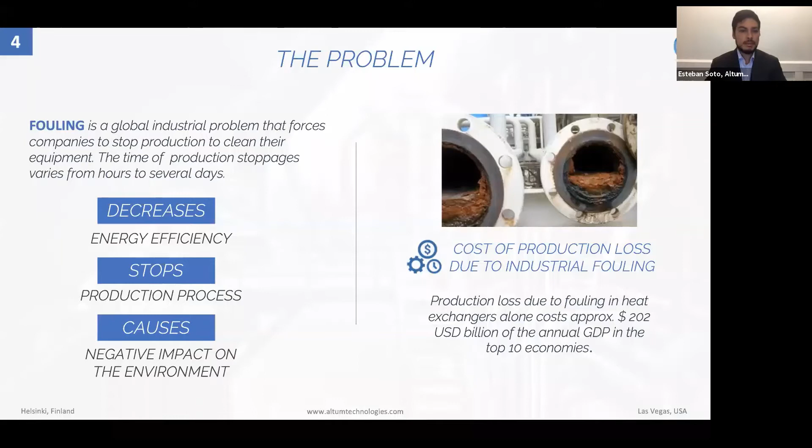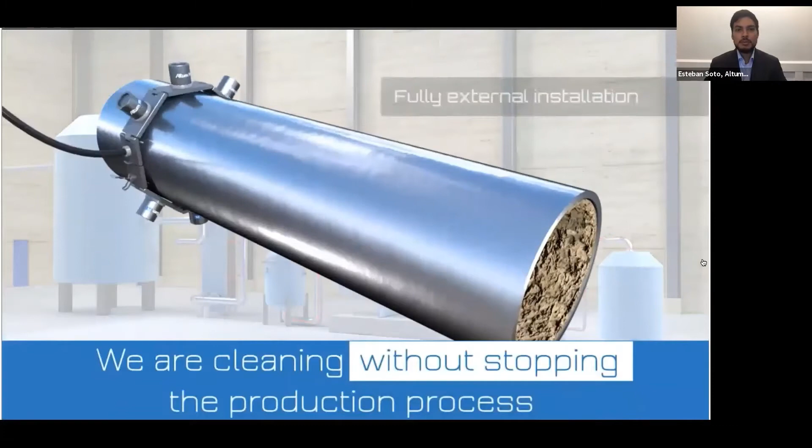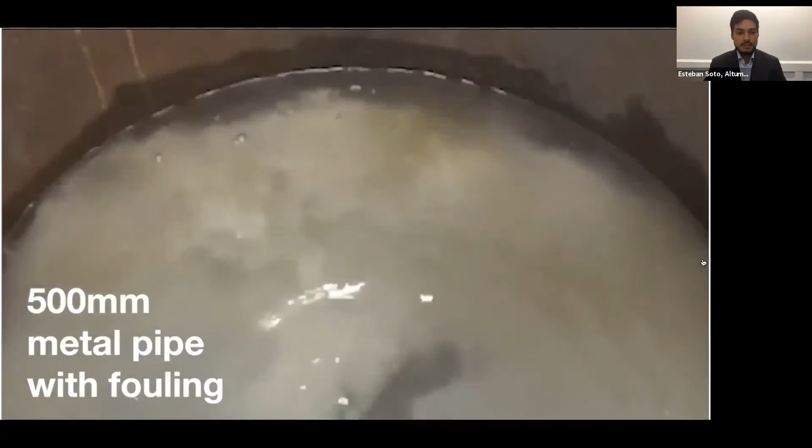So the next slide is a video showcasing the whole idea of our technology. It will give you better visibility of how and where it can be applied, and you will see in real time what it can do to fouling and how it detaches from, in this case, a pipe. So we have here a dirty pipe. Our system wraps around externally, and with the ultrasonic transducers, the ultrasound will penetrate the equipment, in this case a pipeline, and clean everything inside. We have here lime scale, which was hard as rock, and this was the result after 1 minute.

We divide our system into 3 different modules. The first one, which is the most important, is the software. That is basically the brain of the solution.

We can control several parameters, transducer by transducer, so that we get to the specific efficiency needed to treat and get rid of the fouling issues you may have. We can also control it remotely through our software, so it doesn't matter if we're not on site.

We can make sure everything is going according to plan. Then we have the central unit, which is what translates electrical power into ultrasonic power. It's all the electronics needed to fulfill this, and it can take up to 8 channels. We call channels what is transducer plus the necessary electronics needed. It is robust so that it can deal with harsh conditions on the field.

Then we have the transducers, which you apply externally via different types of mechanical attachments, depending on the case. The most usual one is the one you saw in the video, which is a clamp-on device, very easy to attach and apply. No need to do any modifications to the equipment.

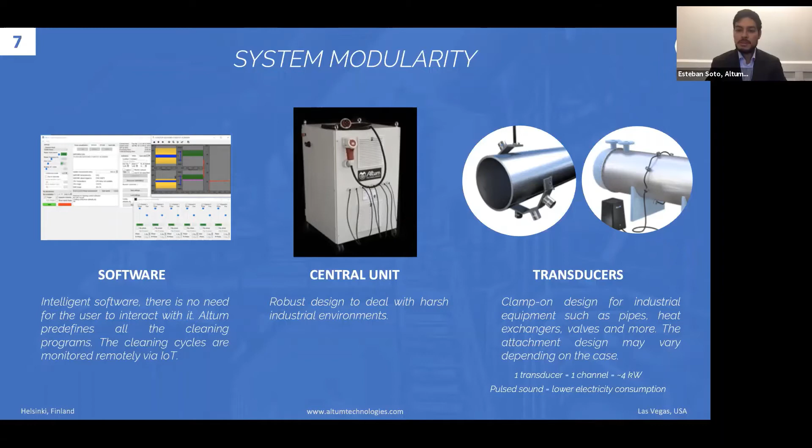Use and applicability: when it comes to the software, we can pinpoint exactly where we want the ultrasound effect, so we can guide it to where it's needed or how it's needed. Later on, you'll see more ways in how we apply the ultrasound.

It's not just to get rid of fouling, but also to create small crystals or to treat liquids. There are different ways we can then use our parameters to control the ultrasound, high power ultrasound, as we really want. The software itself is based on advanced physical model simulations which our team has been able to produce.

It's a proprietary software. Then we have the following types: this gives us an idea of how much power is needed to get rid of a specific type of fouling. For example, if we treat biofilms or biofouling, polymers, those are more elastic, so the molecules will attach to themselves with ease, and it will be very difficult to break.

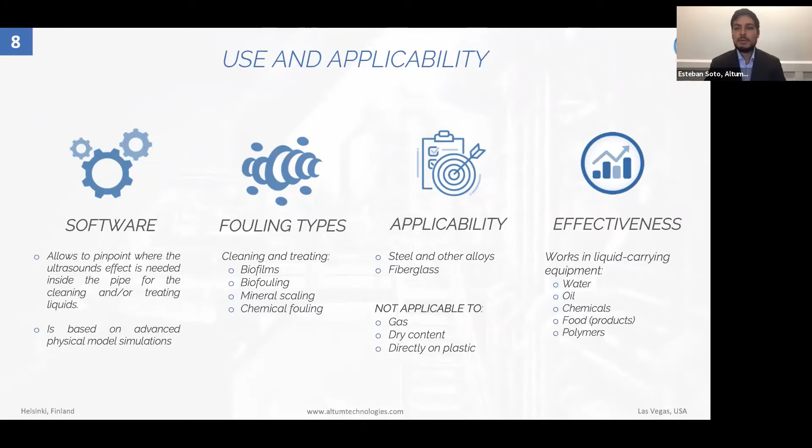So it works in liquid carrying equipment, from water, oil, chemicals, food products, polymers, you name it. As long as there is liquid, the ultrasound will have the desired effect. And based on that liquid type, we know what kind of parameters we should be using.

Related to the cleaning mechanisms, we can go really deep into this, so please let us know and feel free to contact us at any point to ask more questions if you want to know more. We can get back to you on those, and even have people from our technical team join any future meeting to go very deep into this if you're interested in knowing more.

We have different mechanisms to control ultrasound and achieve the result we want. The most effective way to remove fouling inside equipment is to place the transducer directly on top of where the fouling is, so we can produce the sound waves close to that. We can also vary the locations of the transducers along the vessel so the ultrasonic waves interact with each other, sparking even higher efficiency of cleaning or prevention.

We can also go very high in power to produce microscopic bubbles in the process liquid, playing with small quantities of pressure, high and low. By doing this, we interact with the fouling, and that's how it detaches from the internal surface of the equipment.

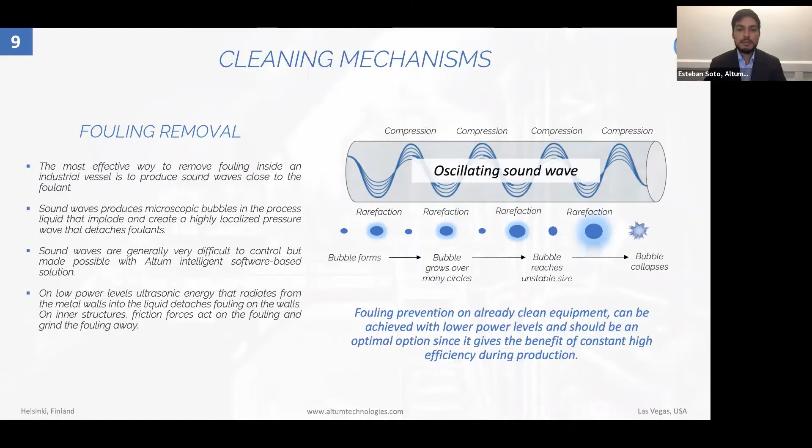Now I'll give the space to my colleague Beta so she can go through different case studies and ongoing cases we have been working with. Thank you, Esteban, and thank you all for joining us today.

We have been working with several projects, and today I will present two evaporator case studies, then go through some of the ongoing cases we currently have in the pulp and paper industry.

As Esteban mentioned, our company started when our founders found there weren't enough high power ultrasonic devices on the market. They collaborated earlier with Stora Enso, one of the companies behind our idea, and we've been collaborating with them for over 4 years now, with the Stora Enso Heinola mill here in Finland.

The mill had struggled for a long time with calcium-based fouling issues in their evaporation process, trying to find a solution to prevent fouling inside their evaporators during operation. They have 7 tubular black liquor evaporators in series, and the process starts from evaporator 6 towards the last evaporator 1A. As the black liquor flows toward the last evaporator, the temperature, dry matter, and viscosity increase, causing fouling issues, especially in the two hottest evaporators, 1A and 1B.

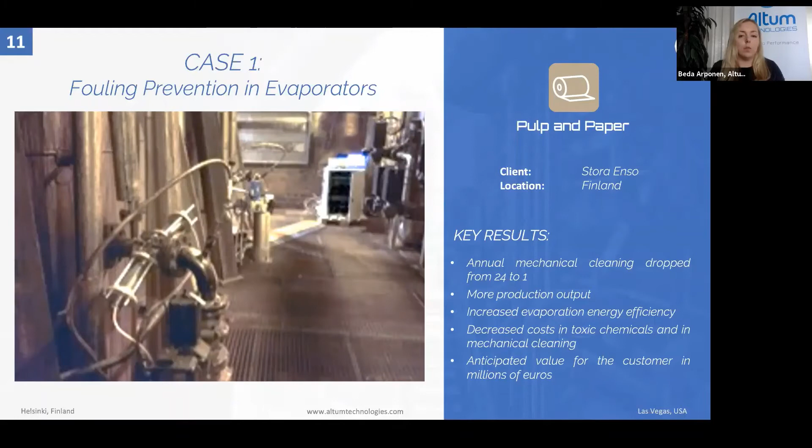Sappi heard about what we were doing with Stora Enso and wanted to try our solution, since they also struggled with fouling issues in their evaporation process. We started the collaboration with one of Sappi's South African mills in 2019.

It was cleaned manually several times per year, even monthly. And when this evaporator needed to open and clean, the customer needed to stop the whole evaporation process because the whole process is in series.

So like in the previous case, our solution was attached externally to the inlet pipes of evaporator 1 to prevent fouling from accumulating inside the evaporator's tubes. Only after a couple of months of operation, the customer was able to see benefits and good results.

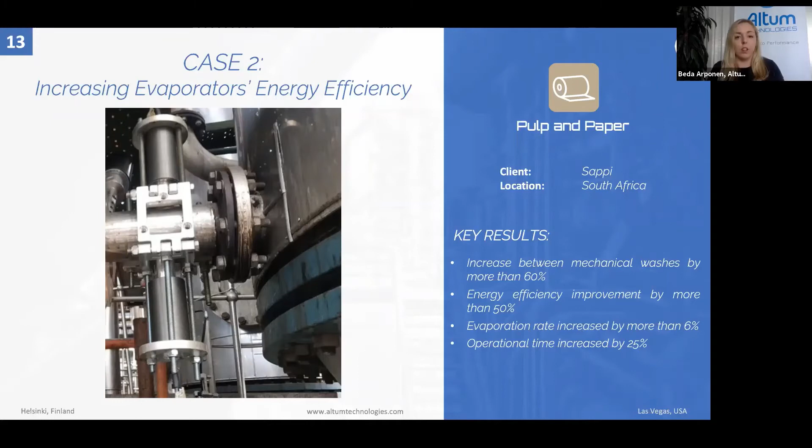We were able to increase the time between mechanical washes by more than 60%, but also improve the energy efficiency of this evaporator by 50% and the operational time by 25%.

The positive results were also seen in evaporator 2, whose inlet pipe we did not attach to, but the prevention effect carried from evaporator 1 to evaporator 2. The energy efficiency of evaporator 2 was increased by more than 40%.

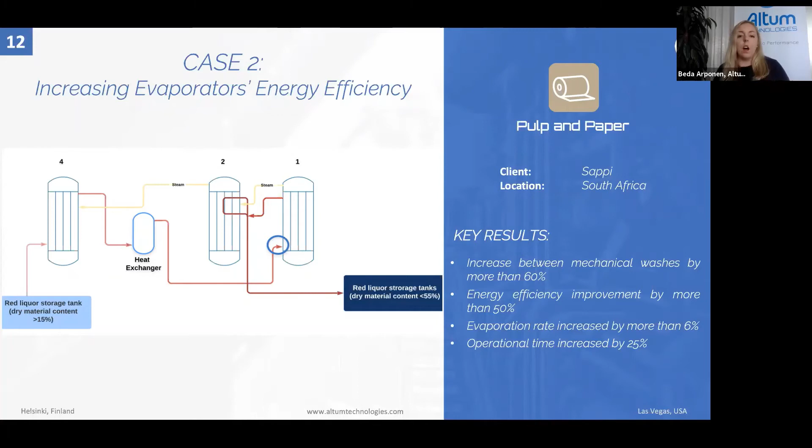To give you a bigger picture of where our solution is used and how versatile it is, I'm going to shortly present some of our ongoing customer cases in pulp and paper mills. At the moment, we also have 2 other evaporator cases in 2 leading pulp and paper companies in Asia.

There we are also keeping clean the most fouled evaporators. However, these cases differ from the cases I just presented, in that they have lamella evaporators instead of tube evaporators, and the fouling type is mainly burkeite. These are ongoing projects, but the results seem positive already.

We are also preventing fouling in the upper screen of the impregnation vessel, where mainly calcium-based fouling is clogging the screens and causing issues to the production process.

Besides, we have a case in Europe where the customer's main fouling issues are in their critical production pipeline. They were not able to get rid of biological fouling and hemicellulose entirely with high pressure cleanings, and thus they wanted to try if our solution could clean the pipe.

So first we did the cleaning trial, which was actually very successful, and we were able to clean the pipe section by section. Now we are preventing the growth of hemicellulose and biological fouling in that pipeline.

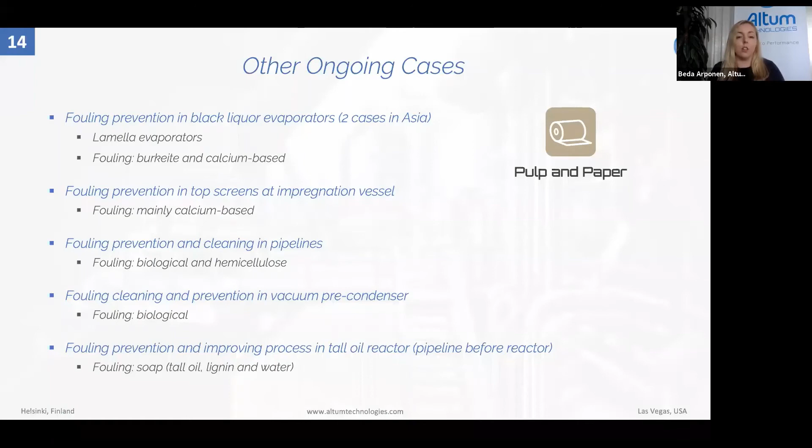Our solution can be used in different parts, not only in evaporators, but also in pipelines, valves, filters, and so on. The one thing is that fouling prevention and cleaning of vessels is not the only objective where our solution can be used.

You can also use our solution to improve your process. For example, we have a customer here in Finland where we are improving the separation of lignin, water and tall oil from each other in a customer's tall oil reactor.

We have already seen that we have improved the separation by 2 to 5 percentage points, which helps the customer gain more tall oil from their process. Our solution can also be used in wastewater treatment plants, where we can, for example, increase the dry material content of biosludge.

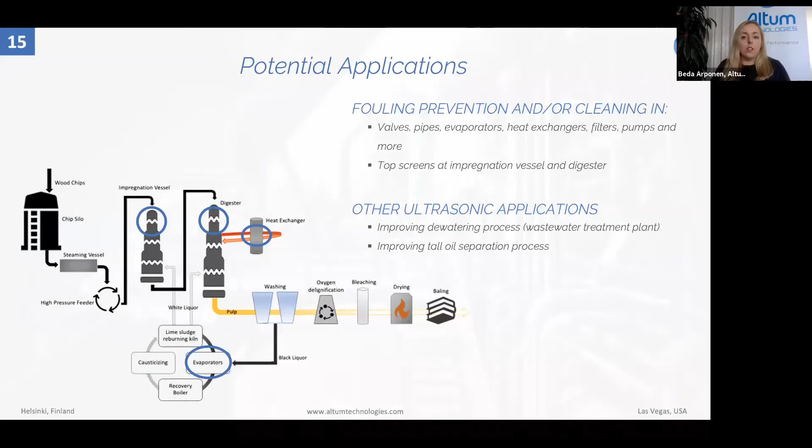So to summarize, based on our experience with our current customers, here you can see some of the benefits in numbers that you can gain when using our system. We always collaborate with our clients and analyze the historical data we get from them, comparing that data with the data after our solution has been installed.

As you can see, our customers have seen different benefits in their processes, especially in their evaporation process, which is often also one of the main bottlenecks in pulp mills.

With our solution, you are not only able to reduce or get rid of mechanical and chemical cleanings and unplanned production stoppages, but also improve the energy efficiency, capacity, and operational time of the vessel in almost any part of the process.

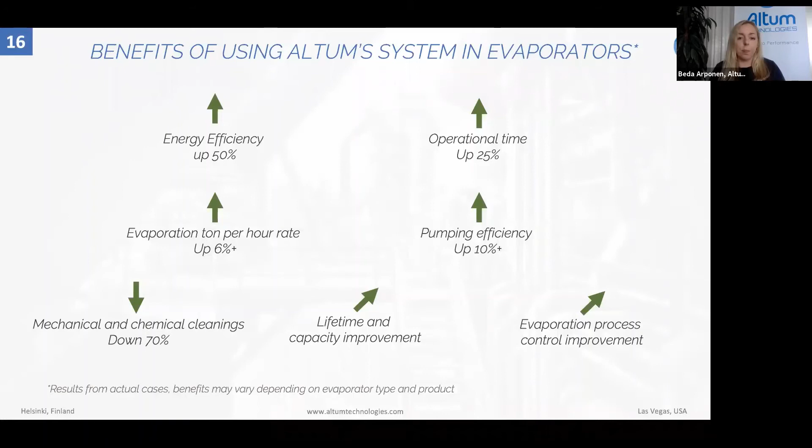As a reminder and summary, Altum is the only company to use software-guided power ultrasound to remove fouling from industrial equipment without the need to stop the production process and without the need to use toxic chemicals to do this.

So by using our system, your mill will be able to, first of all, remove and prevent fouling. That's our main goal. Regardless of the equipment and type of fouling, we are also always looking for different ways that we can support you so that you can forget about those issues altogether.

We can then, with your help, increase process and equipment efficiency by keeping your systems up and running all the time.

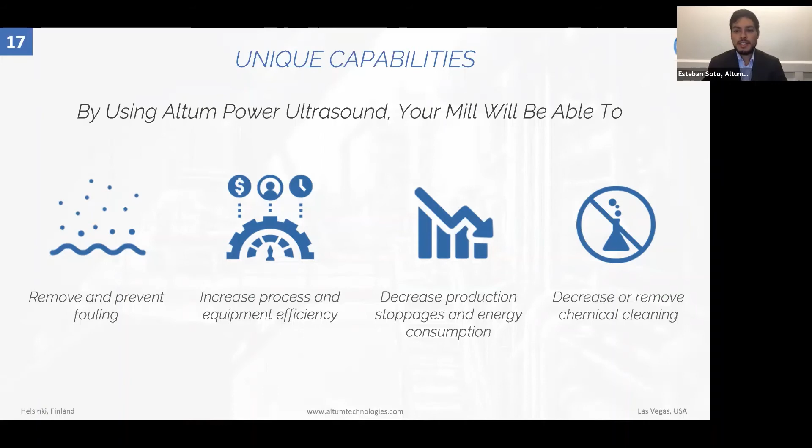We can also, as you saw in our cases, decrease the production stoppages and energy consumption, and decrease and remove the need of using chemicals for cleaning. All of this is also linked to our sustainability facts and something that we are also working towards, and our clients as well. We are all in the same goal of making our production profitable, but also sustainable.

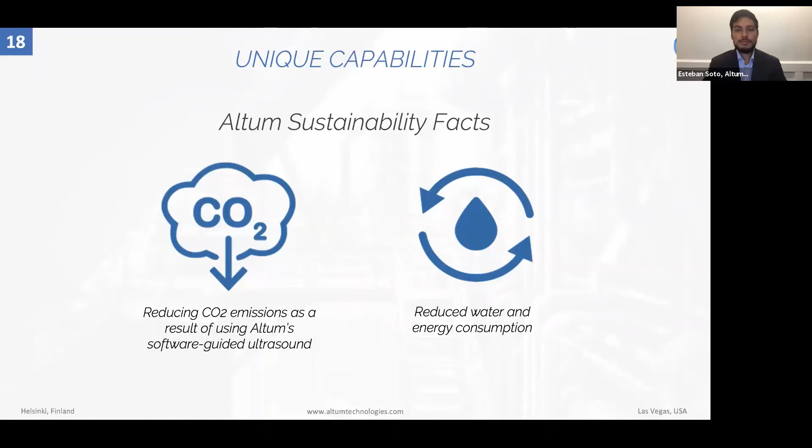And by getting rid of fouling, you won't be using as much energy. What this means is that the amount of CO2 emissions will be reduced. As well, when you need to clean, many of our clients need to clean with water jets, and they are then going to use a lot more water than intended. We are then also able to get rid of this water consumption issue.

Just to give you an idea of how we work, and happy to also discuss more with you about this point later on. Once you have a case in mind, or an idea that maybe they could help us with this type of case, we'll be happy to have a call with you and see what your thoughts are. After this, we have a case questionnaire that we send out, which is a guide to let you know what type of information we need. Based on that case questionnaire, our team will be able to analyze your case and decide what will be the best way moving forward.

What is the approach that is needed? We're very transparent about it. If it is something that is out of our reach, we will let you know. We don't want to waste time with anyone. We want to be of help for you.

When it comes to our business model, the way that we want to help our clients reach ROI as fast as possible is by providing two ways of acquiring our solution. So we're very flexible about this. Some of our clients like to lease the system. Some want to buy the system right away. So it really varies. The way a leasing agreement works is that once we get the details and know how we can help you, we'll be able to understand the time frame needed so that you can see the results. That's when the monthly service agreement starts.